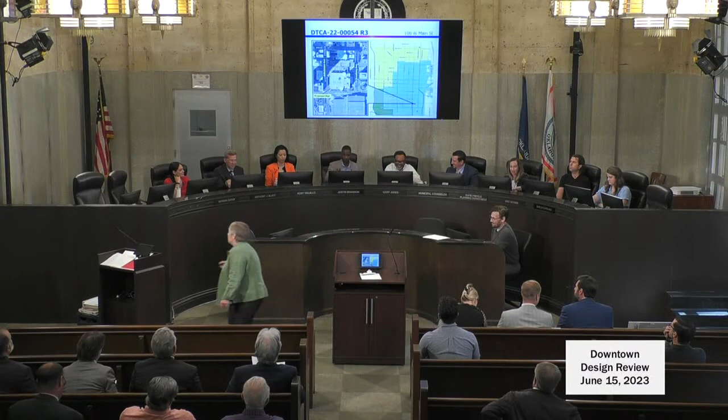So you might recall, we've seen this a few times. Channel 9 studios have moved in, and you had approved some signage. The original sign, where the red square was, was smaller, and after they got into it, they realized they needed to enlarge it so it actually matches where the Jumbotron is and the address going underneath it. So they originally were approved for 400 square feet, and the new one's going to be 627 square feet. And it's perforated metal, all painted white.

And it lent itself very well for me to do these little pink squares so you can see where it's going. They are going to need a variance because this is an increase on the total square footage allowed on the Robinson Street facade. It is a large building — literally the entire block is a building. You have this building at one end, and the hotel at the other end, and in the middle is the parking garage.

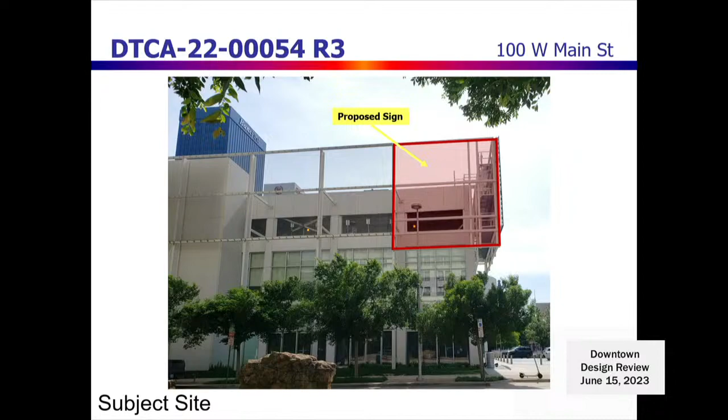Staff typically doesn't support more signage than allowed, but given the partially transparent material and the fact that, in my opinion, it's going to blend in and won't be an in-your-face fluorescent red type sign, staff has no objection to the request before you. We have a recommendation of approval subject to them getting a variance as stated in the staff report from the Board of Adjustment. You will also need a second motion for the recommendation to the Board of Adjustment. We do have representatives from this application — legal staff, and the design team representative here as well. Do you have any questions for me?

Seeing no questions for staff, we'll take comments from the applicant at this time.

Good morning, David Box, 522 Colcord Drive. If you recall, before Griffin took over this building, there was an electronic sign that wrapped around the building. We were involved in that. One of the concerns at that point was the Colcord rooms facing that.

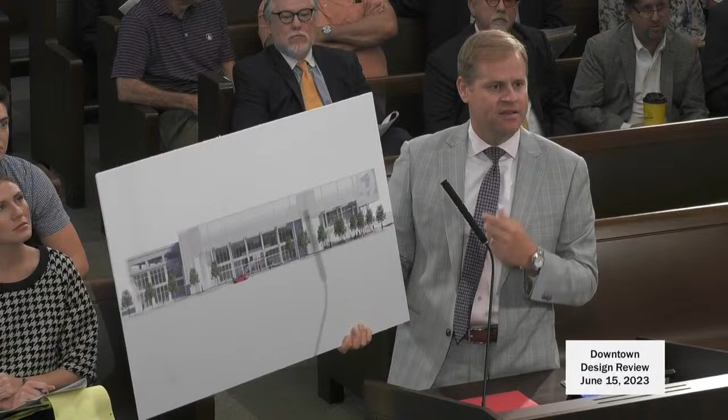Since Griffin's taken over, they have revised the sign. The sign is now strictly south-facing, which faces the Prairie Surf Media, Cox Center, whatever it's called these days. So it really didn't have any impact. Although this is, by definition of the code, a sign, it's not electronic, it's not backlit. It really is just a mesh material that will blend in with the balance of the mesh material.

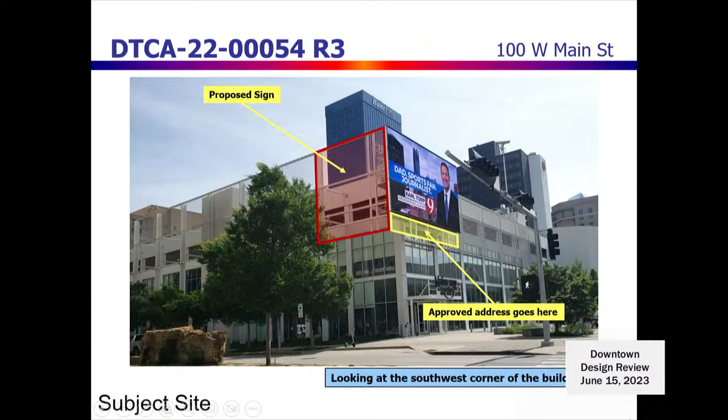So on that basis, we think it's compatible. We think it's an attractive element to the building. It really shields what would be the upper floors of that parking garage. Happy to answer any questions. We do go to the Board of Adjustment this afternoon at 1:30, hopefully, assuming we get a positive recommendation here this morning. Are there any questions for the applicant?

If there are no questions, I'll take a motion.

I'll move to approve the application on the basis that the project complies with the regulations and guidelines of the Downtown Design District Zoning Ordinance, as referenced in Sections C and D of the staff report, with the condition that the applicant obtains a variance from the Board of Adjustment from the time limits on super graphics and from the maximum allowable sign area regulations.

I have a motion. Do I have a second? Brannon, second. I have a motion and a second. Please vote.

Motion passes. We need a second motion in order to request the variance. I move to provide a recommendation of approval to the Board of Adjustments for a variance from the time limits on super graphics and from the maximum allowable sign area regulations.

I have a motion. Need a second? Brannon, second. I have a motion and a second. Once again, please vote. Thank you. Motion passes.

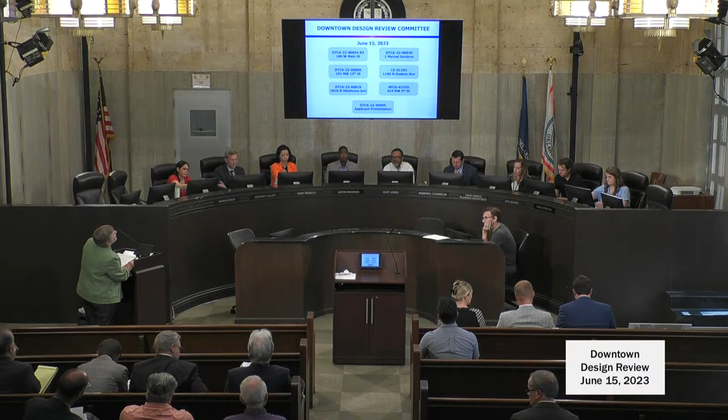Which then moves us to the second item on the agenda, which is DTCA-22-00085 at 101 Northwest 13th Street. Staff? Thank you.

They came in with a PUD rezoning that did not go before you because it was not in the Downtown Design District. However, that PUD specifically stated that it would go through the design district process. This was in 2020, and the base zoning was DTD1. So it was as though it had specifically been zoned into the Downtown Design District.

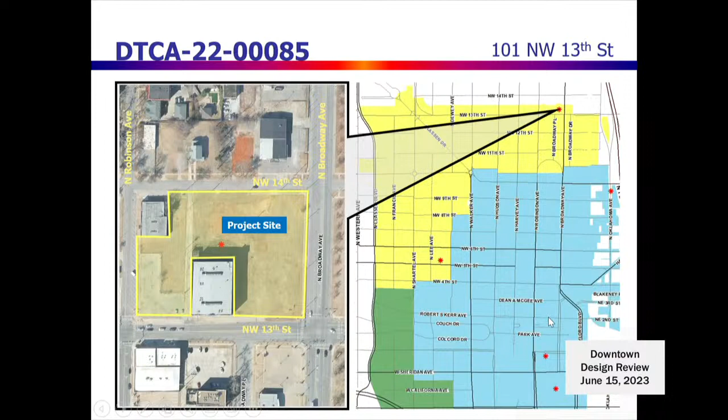So the entire block, except for the northwest corner where we have that existing one-story building, is under your purview for design review and approval. The project you have before you today, as you can see, the yellow square is going to surround the two existing buildings. I'll just go through the slides.

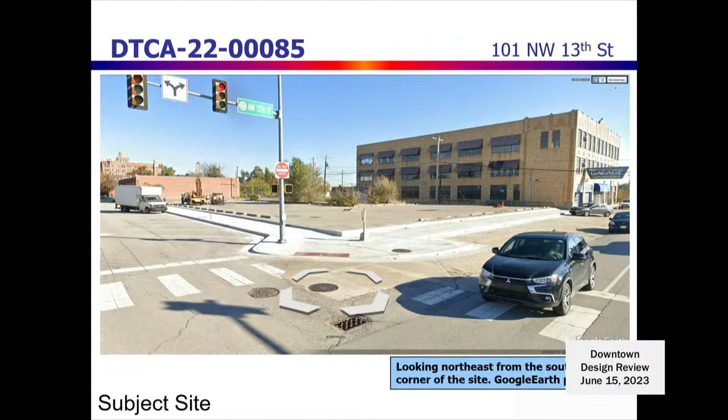Currently there's grass. There is a north-south alley that runs up the west side of the garage lofts. The rest of the site, although there is some dirt on it now, has a parking lot on the southwest corner that was used, I don't know if it still is, by an adjacent church.

And then you have the garage lofts, which I had indicated in the staff report originally was a car dealership, which I think is kind of fascinating, although technically Automobile Alley doesn't include this area, but this was definitely a car dealership. It was shown as Norton Brothers Buick.

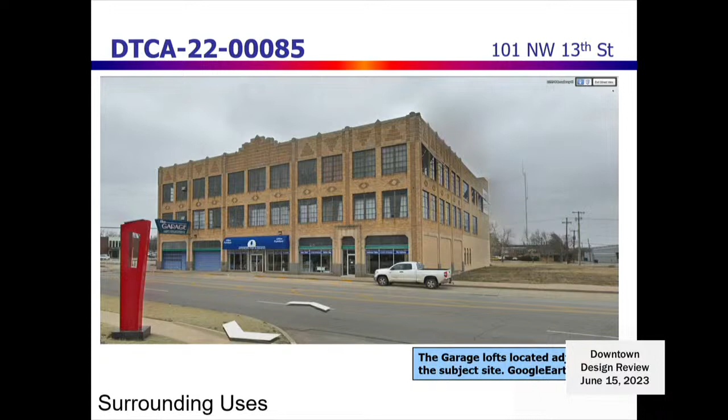And then you have in the northwest corner a one-story building that had apparently been a dry cleaner at some point. It is boarded up, but everything is still kind of there, although I doubt the windows are, but it has some great brick work.

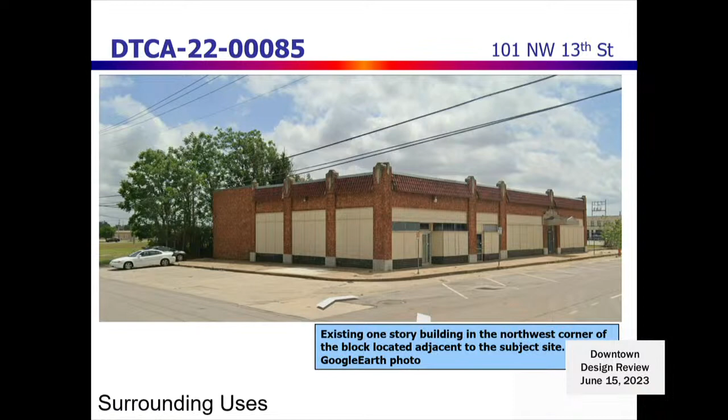And then there are various uses in the surrounding area. This is to the north, but I understand it's no longer a residential use.

And then you have some non-residential uses to the north of 14th Street. This is across to the east, which was part of the DeLisi property. They owned, I believe, all the way up to 15th or 16th. And that has come in and been approved for a PUD.

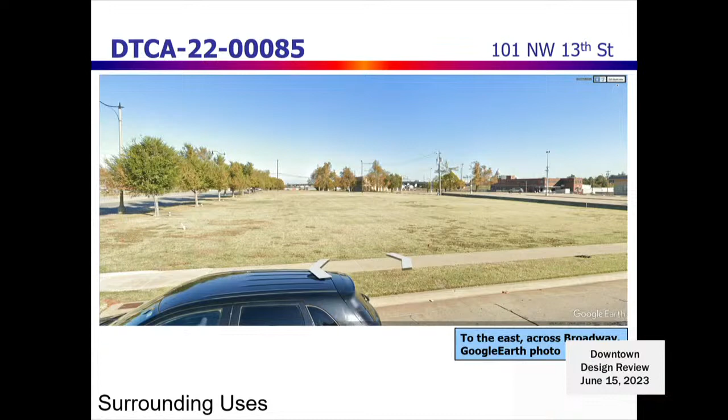Only the corner is in the downtown design district, and that was not included in the PUD. Everything else around it was to the railroad tracks.

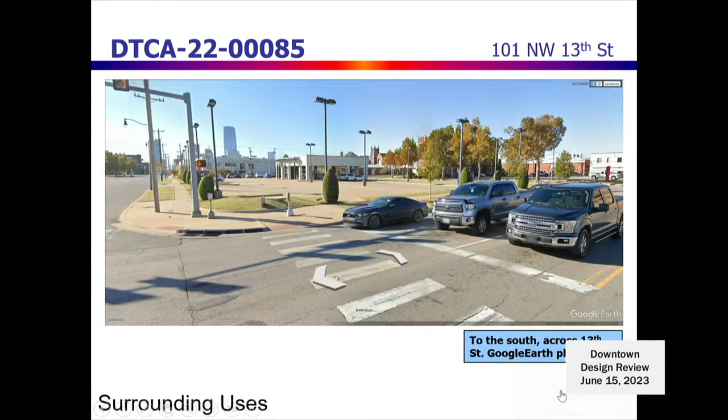And then you have to the south on 13th Street, where we had some car dealerships, used car dealerships, and we have some buildings being renovated for non-automobile uses. We have this apartment building that's to the south across 13th Street, and this is also on the south side of 13th Street.

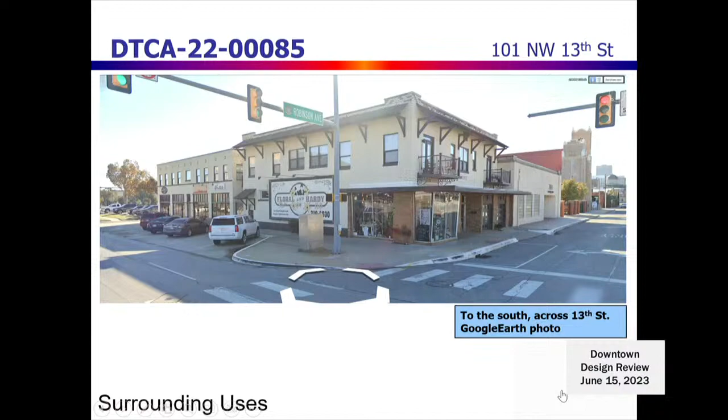So let me go back to the aerial - it's a good one to stop with. There were two specific areas that they needed to get variances from in this proposal that I discussed in the staff report.

One was signage. I think most of us had thought that we'd have the new sign regulations by now, but we don't, so we have to use the old ones, which only allow one sign per tenant, no matter how big the building is, even if it was only a single tenant in a building with 2 street frontages - they're only allowed one sign. And it also limits the square footage of signage to 150 square feet.

And so when you have a building that's the length of a block, that isn't really proportional to the building. So we included all of the information about signage from the regulations.

So the bank is wanting 2 signs. The bank is going to be on the corner, and the apartments, which will wrap the bank, has 3 signs - 2 actually on one, on the south facade, because they have a sign for their leasing office, and then a sign that's up higher where you would actually see it on the top of the building on that side. So staff supports the request for more than 1 sign per tenant and for an increase of total signage.

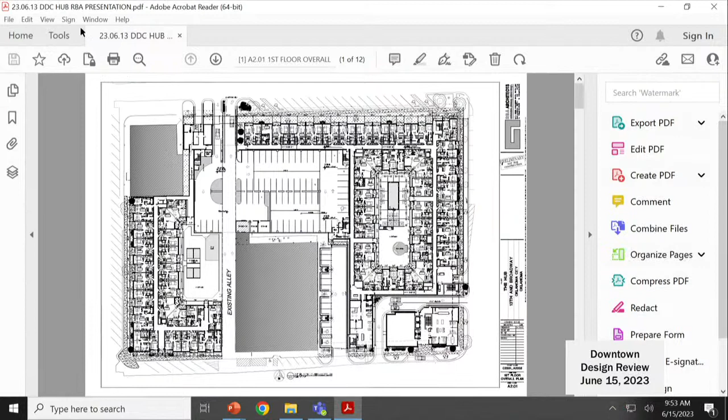That's okay. This is our site plan, and as Laura described, we have 3 sides of the project. On the bottom, on the south face, is Northwest 13th Street. East is Broadway, Robinson, and 14th Street.

We really, in deference to Gary, it sounds like we have a lot of issues. Signage is one issue, and maneuvering space. We have a trash room in the bottom corner and a trash room in the top corner, which requires some maneuvering of the trash truck to get trash out. With their conditions that the overhead doors stay closed, we don't have any problem with any of the conditions that they place. So that's one.

The signage is another, and we understand that the signage ordinance is going to be revised. So we're really not asking for a lot of signage, just adequate signage for both the bank and for the apartment complex. And it is a big project.

It wraps all the way around all 4 sides with, in my mind, one of the issues with staff was that we could continue it to make our design more cohesive with the neighborhood, and I don't know what we would actually make it more cohesive with. As you saw from Laura's pictures, it's a very eclectic neighborhood, so there's a lot of different things going on.

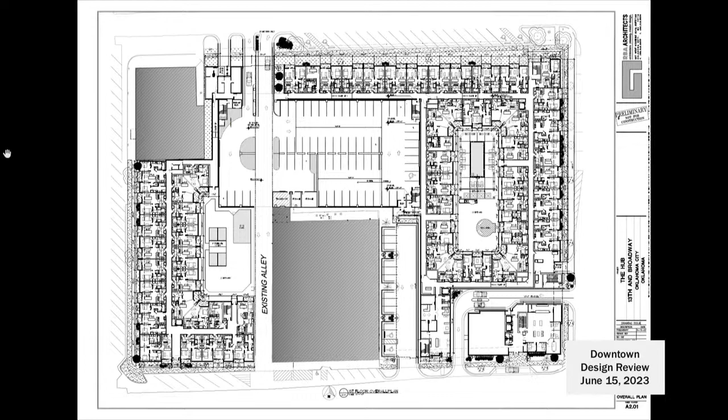It's a 7-story, 61,000 square foot building. Core bank would occupy the bottom 2 floors, and there's a rooftop restaurant that would be on the top of it that has some outdoor seating areas that overlook downtown.

The garage lofts building, we've kind of framed it with the apartment buildings, and it's kind of like putting a parenthesis over an important sentence. It sort of emphasizes it. One of the ways to relate buildings is with scale, and our apartments are 4 and 5 stories, which very well coincide with the height of the garage building, and I think really emphasize that that's an important building in the middle of the block on 13th Street.

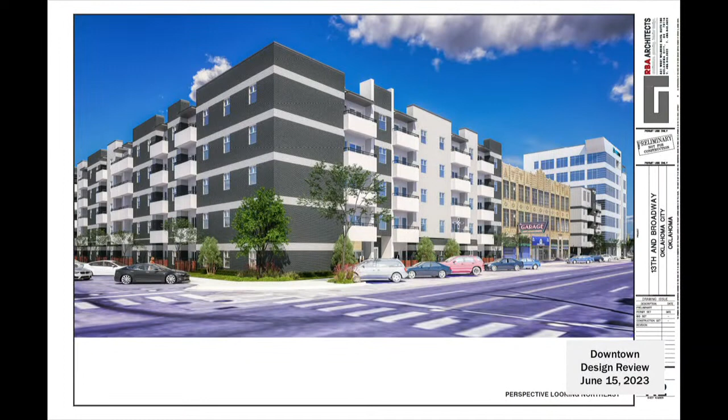The materials of the apartments are primarily brick and plaster. You can see again, that's the 13th and Robinson view of the project. We've got 2 different colors of brick and a matching color of white stucco on the building as well.

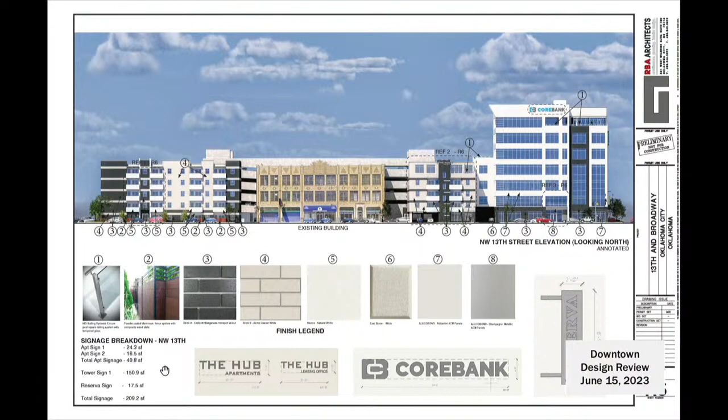Again, these are just the various color elevations of the building, walking around the building.

And that's kind of a summary of the project. That's a quick summary, and it's a big project, so we want to answer your questions. We've got people here that can answer the questions I can't, and we appreciate your consideration, so thank you.

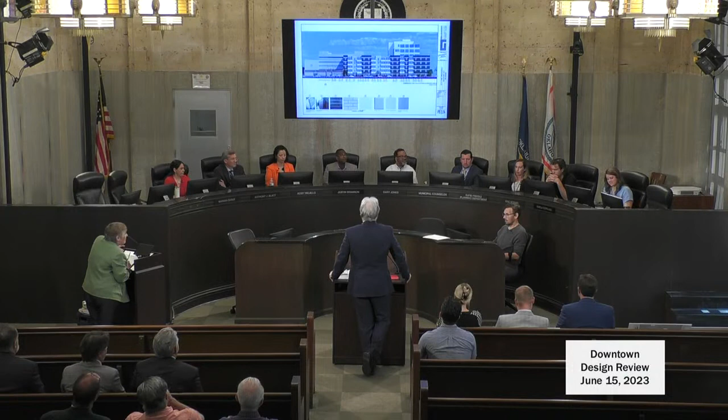I think the first thing that stuck out to me was the cool palette versus the warm existing palette. That's where I saw the most contrast. So I don't know if the hint comes from color. I don't have an answer, but I also agree that the development is very much, like, we're excited about it.

So to appease what we're looking for, being part of the neighborhood and not standing out too much - I mean, we want you to stand out. You're going to be new and fresh, and we're excited about the new vision of where this area is going. I don't know, I agree. I see the lines that you're aligning with, I think that's a really nice touch. But the color is the biggest thing for me, and I don't really have an answer. I don't not like it, but I understand our requirement to kind of complement the neighborhood.

Yeah, we thought about that a lot, Kayla, and as Anthony said, trying to mimic materials - to me it looked like a near miss, like he said. Our thought as a designer was on where the garage lofts is - the 1-story building - I really think, I mean, our clients have tried to purchase that and incorporate it into this project, but the ownership, one day she says yeah we want to do that, and the next day she's not. She's older, so we don't know what'll happen with that.

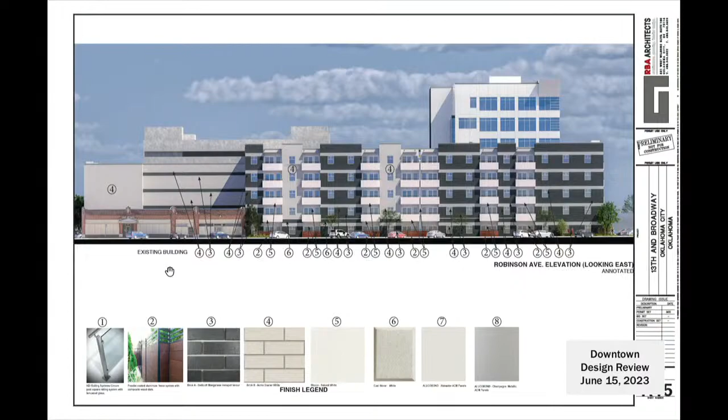Other questions? I have just a couple comments. Could you tell me what the southwest corner floor plan looks like, and then the northeast corner of the site floor plan looks like? I'm assuming they're apartment units. Just wanting to see from a floor plan level what that looks like.

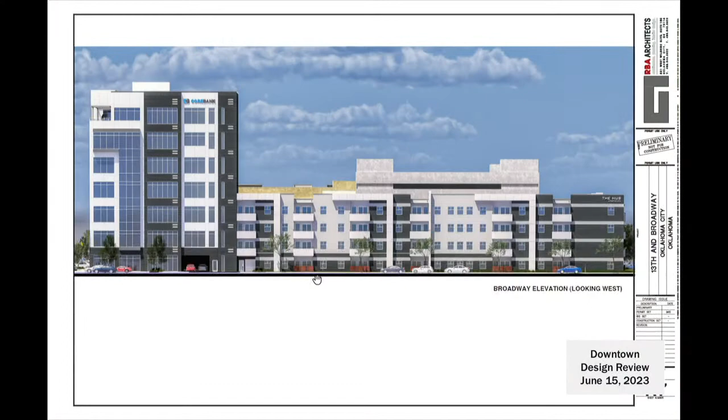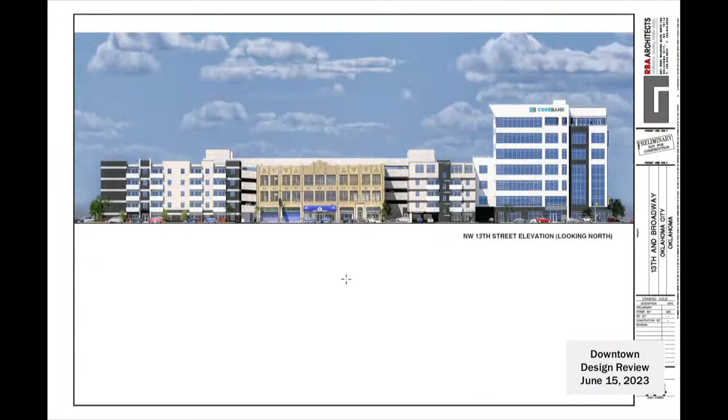Southwest, okay, let's see. Well, that is the southwest corner of the project. I don't believe they included the floor plans in their presentation, but you can get to them on your side. Just want to make sure the public sees what's there. Okay, yeah, it's right down here. Oh, I'm sorry, they did.

It won't enlarge, but this is an entrance off of 13th Street to the project, and this is a two-bedroom unit on the corner all the way up. This wing is our 5-story wing on this end, and that gave us a little more density that made the project work economically, honestly. This is a courtyard in between with a dog park and a pickleball court in that interstitial space. The other portion of the project has a big landscaped area, barbecue area, swimming pool with cabanas, and other site amenities in the interior.

And were you wanting to know about the units in the northeast corner specifically? Specifically the units on the corner.

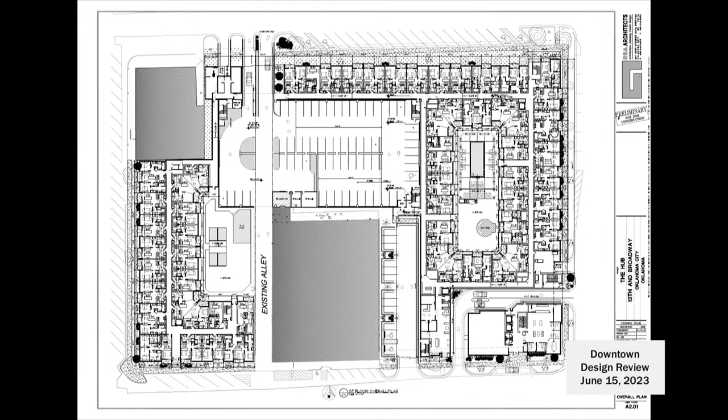Yeah, I think as this is an entry into Midtown, as Core Bank takes the corner, you have 7 stories on that corner, you have this great glass facade on that corner. I think I'd like to see on that southwest corner and on that northeast corner a little more balance, because I think you have a lot of brick on that facade at that corner too. When you look at 13th Street as a whole, Gardner's a block away, you have Harvey Bakery that's approachable to the public. We have 300 units, 300 residences, in this apartment complex, people walking to and from. Is there a way we can make those two corners more approachable, that balances with 13th Street at that 2-story level, glass facade level, to the street, for people walking to and from? Does that make sense?

Yeah, I understand that, and I think that's a good comment. We are currently looking at it - one of our owners made a comment that especially on the southwest corner, not so much the northeast, that side has some great views to downtown. So one of the things we're working on now is taking that end and opening it up a little more for windows, just as you suggested.

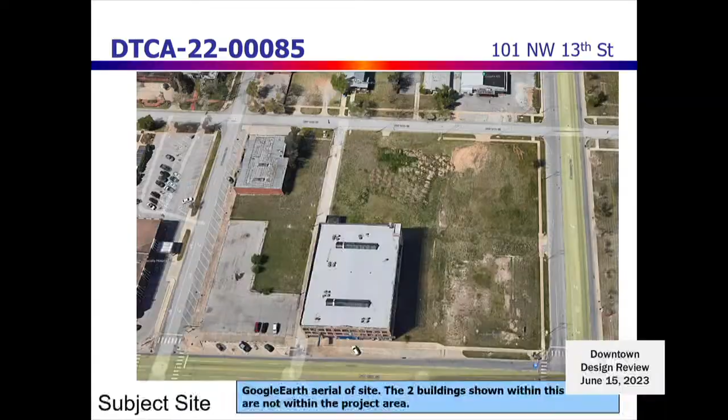So I think there are some detail things that we can incorporate into our building that do reference the garage lofts. But I don't want to go so far as to say, okay, it looks like they tried to match the garage lofts building, but it doesn't - I don't want to get to that point. We can study some facade details that give it that scale and some of that detail that's in the garage lofts building, which I think will go a long way towards making it look like it's at least a distant cousin to the garage lofts.

And I really would like to study that. I want to study Justin's suggestion that we have some more transparency on the corners. I think that's something good and something we're already looking at. So I think those two things specifically are very valid and things that we would want to look at in our continuing design exercise.

But as far as the overall massing and the look of the building, I think it's good. I think we've got a good project, and it's been a hard project to get to this point, as Eric said - an extremely difficult project. I've been working on this since 2018, so it's been a five-year-long journey for me, and to get to this point is pretty significant.

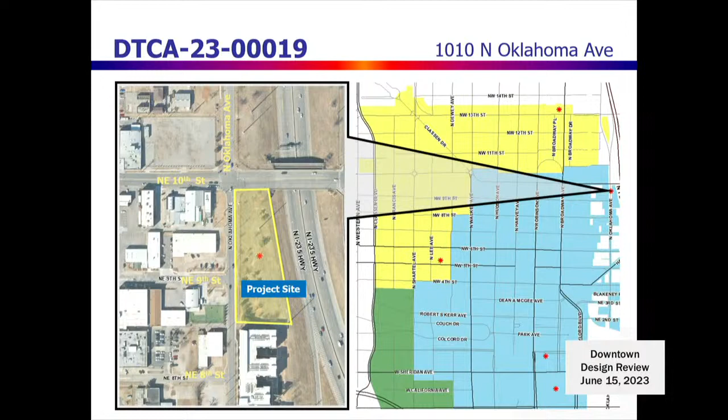Just as a reminder, it has nothing to do with the case. When they came through to rezone this property into downtown, there was a total of 3 properties. One's at 13th in Oklahoma, and the southernmost one is down at 6th and Harrison and Walnut - I don't remember the name at that really bizarre intersection in Oklahoma, south of this one. So we potentially are going to have 3 sites come in for development at some point that had been part of ODOT's right-of-way.

Questions for the applicant? Action.

Make a motion to approve the application on the basis that the project complies with the regulations and guidelines of the Downtown Design District zoning ordinance as referenced in section C and D of the staff report, with the condition that the sidewalk takes priority over the parking lot entrance and exit drives. The elevation of the sidewalk shall remain constant, and the entrance/exit drives designed to angle up or down to meet this elevation. Also, the sidewalk will need to be demarcated in some way across the drives - this can be done with color, texture, or lines indicating the east and west edges of the sidewalk.

Second? Mariana Sarur, second. So Mariana made the second on that. Thank you. And I'm really sorry that I didn't go into detail about why you saw a condition you've probably never seen before.

During review of this, they made a lot of changes, and then I realized, oh darn, I forgot to say something about the sidewalk. So it's like, I'll just make it a condition because you don't need to redo your drawings at this point. So that's typically what we're looking at for sidewalks, that the sidewalk takes priority and driveways have to meet it, and then the sidewalk gets marked across it so you can clearly see where your sidewalk is.

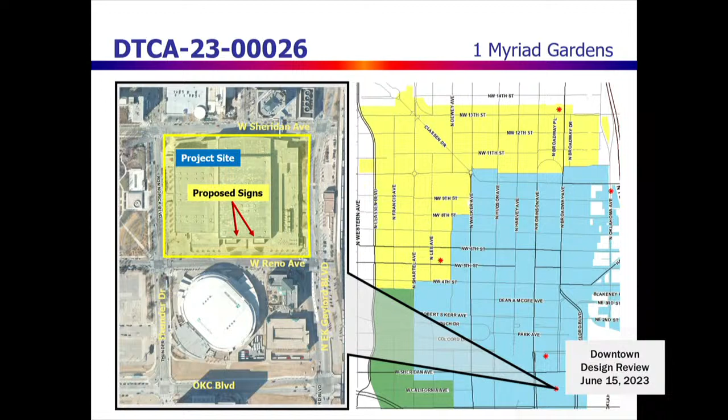We're basically approving them as blanks, and what that means is we're not approving a specific message. Their intent is to put it up for films they're working on, films getting ready to hit, we'll say, the movie theater, so you can go see it, and they would change them out throughout the year. Approving it as blanks allows them to do that without coming back to us every single time.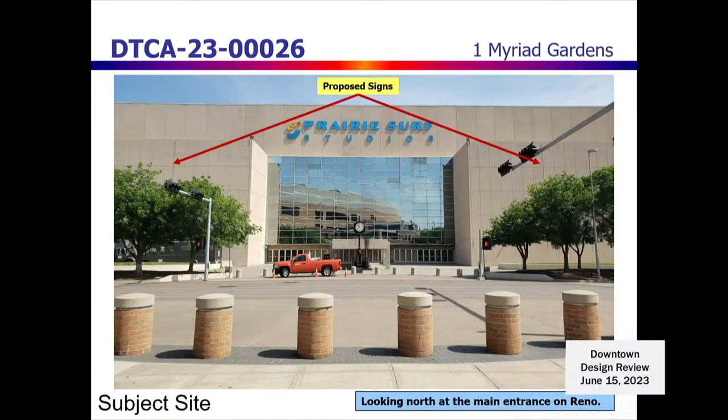We have the condition about needing the variance from the Board of Adjustment, from the time limits on super graphics, and from the maximum allowable sign area. And then we need to provide a recommendation to the Board of Adjustment. So there's two motions. We do have a representative here from Prairie Surf Studios if you have any questions about the application, although he might entertain other questions.

So I'm going to have to defer to legal, but we have very limited ability, if any, about content. Okay, I'm saying it correctly? Totally agree with that. Okay. So from that perspective, when they submit it to me and it's a concert coming up, that's not why I'm looking at it. When somebody submits a super graphic, I'm looking: is it 14 foot up from the bottom? Is it at least 100 square feet? What's the material it's made of? When is this event, when is it going up, when is it coming down? That's really all I'm looking at. So I understand your question, but that's not really something that we can regulate.

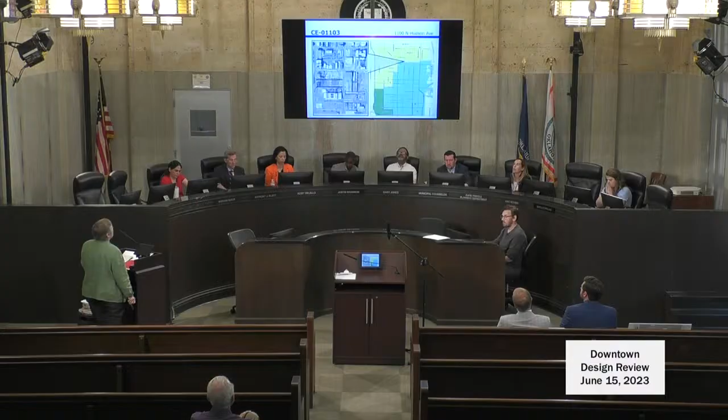So we have a request for all of those areas that you see outlined in black. Some of them are for alleys. We've got east-west alleys, we have north-south alleys. We have part of Park Place, and in one case, we have all of the right-of-way of Park Place. So this is basically a 3-block area, because that one block is a really strange shape and the roads are kind of offset.

The request came specifically attached for the new Family Justice Center, and the MAPS office was one of the applicants. So that is the block. Let me get this here, I've lost my mouse. There it was. Anyway, that is the block on the left, on the west. So that is where that proposed facility is going.

This application is also including the block and a half on the east, and that is why one of the applicants is Midtown, because they happen to own all of that.

So, in no particular order, when you look at this, you have some alleys that are only 10 foot wide, which makes you think, why in the world did they even plat it at 10 foot wide? So that is a non-functioning alley. On the right, you have a 20-foot wide alley. Okay, great, but it's only connected to the two 10-foot alleys, and you can't get to the street. So you can't really do anything with the alleys shown over on that side. From that standpoint, it does seem logical to support closing and vacating those because they are totally non-functioning.

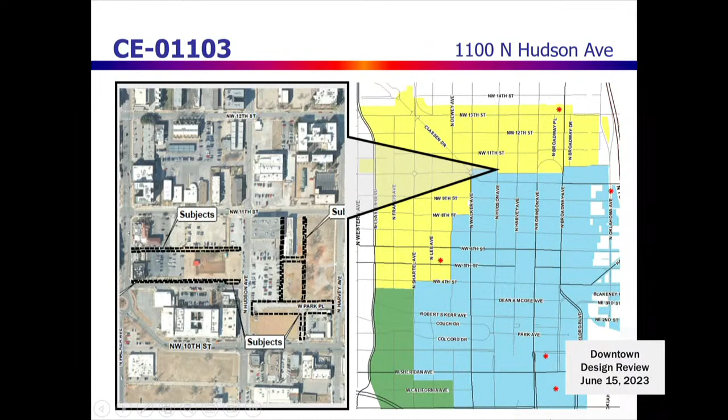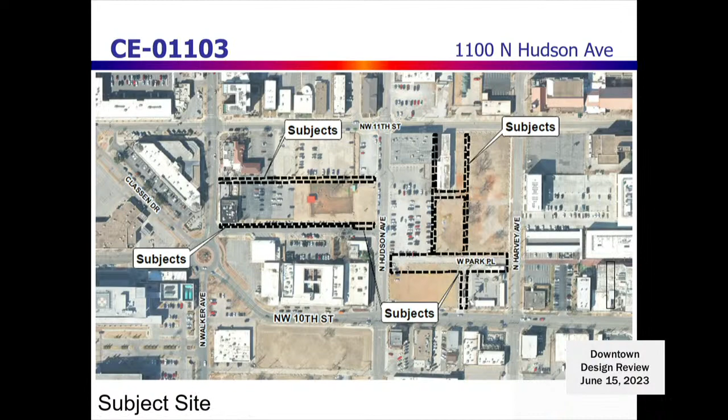We did discuss with the property owners of the property on the east - let me get to the one where I did it. This is just a blowup of that, but I'm trying to get to the one where I did the red lines. There it is.

In talking with the applicants on this, one of the issues staff has is back of house - how are you going to deal with trash pickup and deliveries. That's always our concern when alleys get vacated. So we included wording, which we worked out several years ago when we did some stuff down off Walker, about back of house uses. They need to incorporate back of house uses and we'll be reviewing it when they come through with their CA, because we don't want those right in your face on the street.

The second thing we talked to them about was pedestrian access, because when you close that much, including a street, you want pedestrians to be able to get through there. When you look at this view, you see the traffic circle on 10th, and that is where Classen Drive has been closed and vacated, becoming a whole pedestrian plaza. So that's great at one end.

And then when you look over, there it is - this is Robinson, all the way on the east side. You might remember, if you've ever gone to the Garage restaurant, there's this area that kind of looks European, like you've got this paved street but you can't drive on it because it's just got tables. That was closed to allow pedestrian access.

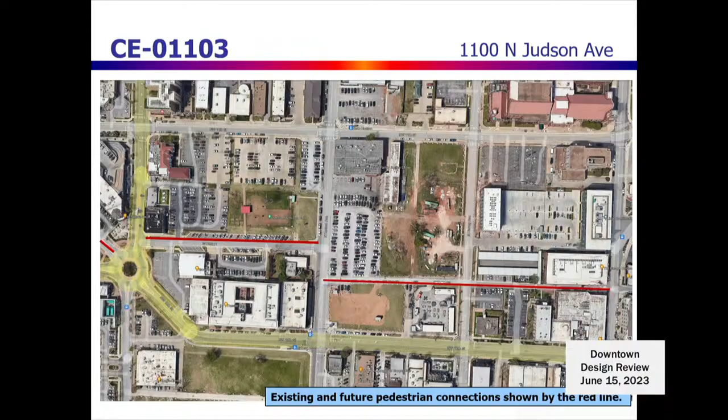Good afternoon, Mark Zitzow with Johnson & Associates. Brian Fitzsimmons is here as well, representing the project. Laura did, I think, a great job summing this application up. It's a bit of a unique scenario here in that we're using what's known as the urban renewal vacation process.

If it's an urban renewal project, or if it meets their guidelines and the urban renewal intent, what it allows for is to go through the closure process with vacation at City Council. Typically, we'd be going to district court. So all those applications are in staff's hands and are under review.

We did work with staff to come up with these two conditions that are relative to what would be the eastern portion of this application. Laura noted that much of the existing alley network is not functional based on current codes and minimum fire width. So we think that portion on the northern piece of that block is clear.

On Park Place, we are seeking that vacation. We are committed to the 10-foot pedestrian easement that will go through and be decided at the time of redevelopment. That's triggered by when development occurs adjacent to that alley, which is when that easement would be granted. Part of the reason we did that is because the site plan's still being worked on, still being refined. It's not entirely known exactly where that easement can be located.

So rather than tether that block to an exact location, we'll be bringing that before you at the time of redevelopment. At the end of the day, we think it's going to create a very nice pedestrian pathway all the way back to Robinson, by Garage Burgers and the Lingo office.

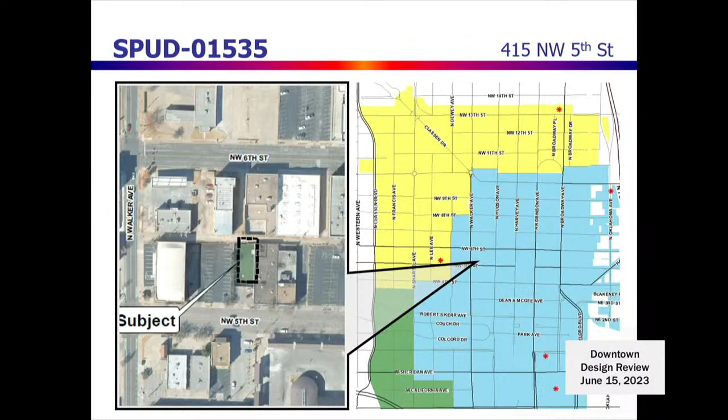So if there are no objections, we have received the communications. I think we can go ahead and hear the attorney's presentation. We can ask questions at that time, and then we can decide what we'd like to do moving forward.

Okay, so this is a presentation on the continuance? That is correct. Okay. David Box, 522 Colcord Drive. Before you go, are there no objections? Go ahead, David. Sorry about that.

Yeah, ideally I'd spare everyone an hour-long tale. We got a bunch of protest letters. When matters like this go before Planning Commission, City Council, which is where this will ultimately go, it's almost a requirement that we defer the item to go have a meeting with the interested parties. We do have a meeting set up next Monday with a gentleman named Mark Henriksen, who alleges to be an attorney for various folks that are involved.

I know there's at least one person here. So the reason for the request is to defer it, to allow a meeting to take place to see if some sort of solution could be reached. So happy to answer any questions on that piece of it.

Are there any questions? There are none, but what I think would be appropriate at this time is we do have a couple of individuals that have come to speak, and both of these people I've spoken with previously. So, Mr. Berryman?

Hello, my name is Mike Berryman, and I am at 426 Northwest 5th Street, which is right across the street from the property at issue here. And so I would urge this body to go against the continuance today, simply because this property has been in violation of the zoning code now for the past 2 years.